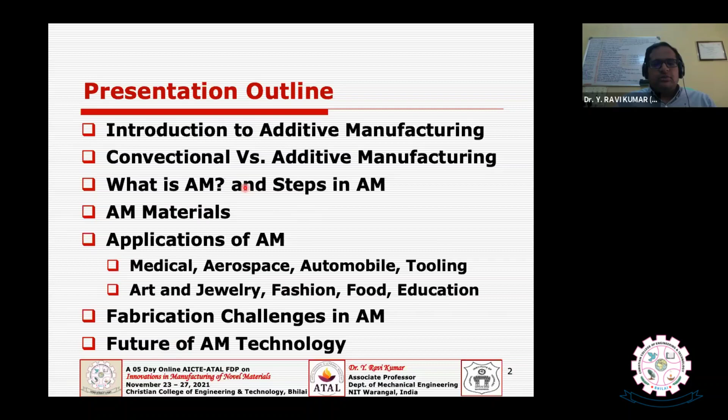And where is additive manufacturing fitting? We need to recollect the various industrial revolutions. We know the first industrial revolution. It was during the 1780s to 1860s, with the word coined as mechanization, where mechanical production systems were being used, replacing human muscle power, and steam energy and water energy were the sources of energy during that time, the first industrial revolution.

And coming to the second industrial revolution, between the 1870s and 1960s, assembly lines were introduced, and electric power was the source of energy, replacing steam and water. So that is the second industrial revolution. And coming to the third industrial revolution, computing, information technology, automation and electronics were the major technologies, during 1970s to 2010.

And coming to the present fourth industrial revolution, you have autonomous systems, cloud computing and system integration, simulation studies, IoT, Internet of Things, augmented reality, virtual reality, big data analysis, cyber security. So like that, you have several technologies. But what is going to be the manufacturing scenario under this industry 4.0? Under industry 4.0, undoubtedly the manufacturing is getting shaped into additive in nature.

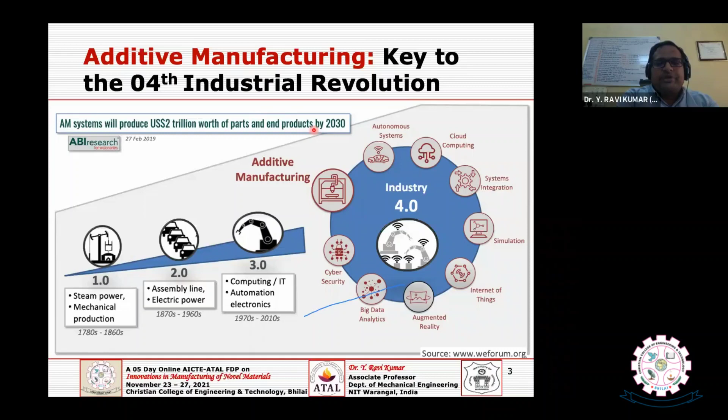So that's what various studies are quoting, that the additive manufacturing systems will be able to produce US$2 trillion worth of parts and end products by 2030. A lot of projections, a lot of expectations on this technology. Under the fourth industrial revolution, additive manufacturing is going to be the key technology as far as manufacturing is concerned.

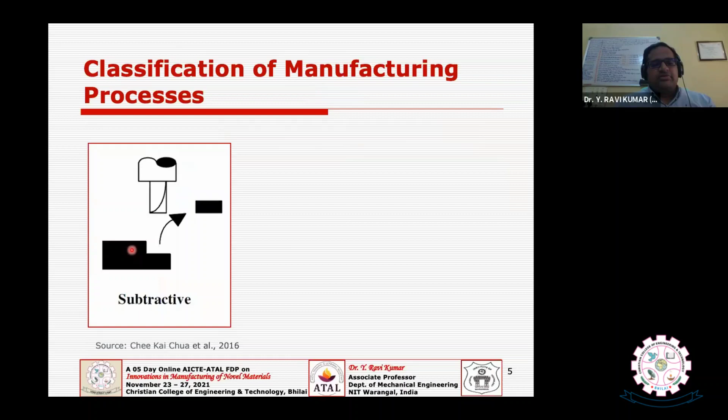Then let us quickly see, before starting the additive manufacturing technology, the classification of manufacturing processes. Of course, you come across the subtractive manufacturing process like CNC technology, where we need to start with the bulk material, which is in excess of the product you are looking at, and use tools to remove the material until you get the required size and shape. You keep on doing it.

But the major concern in this subtractive nature of manufacturing is scrap, huge scrap you are anticipating. And further, if you increase the complexity of the product, it may lead to an increase in the cost of production. We have other concerns, like sometimes we need to design a jig or a fixture to hold the workpiece. So like that, several constraints.

So if your design has been changed from a simple geometry to something like a coffee cup, this kind of freeform surface, you have to consider several constraints. Why? Because your CNC or subtractive manufacturing system has to be concerned about the cavity that is too deep here to machine.

What kind of tools we need to approach with, and you have an undercut here, which requires more than 3-axis control of the system, and we need to design a fixture to hold it from the bottom. That is an additional burden, and you have a sharp internal feature here which cannot be machined without a tool radius. So your approach starts from a block of bulk material to the required shape, and we need to consider these constraints.

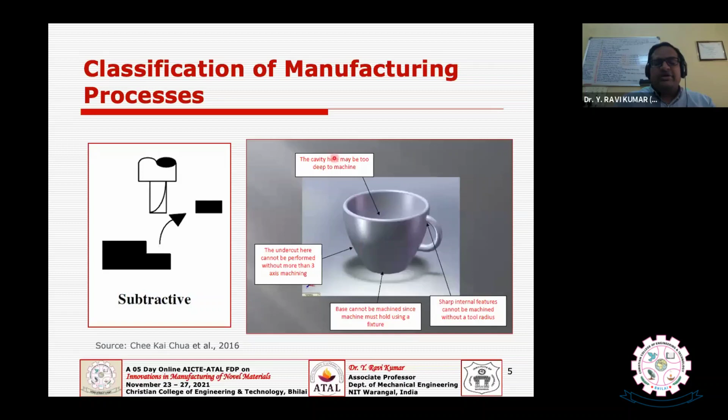But these constraints may not be an issue once you come to the additive manufacturing route. In additive, irrespective of the complexity, you are adding the material rather than removing it as in a subtractive process. Then there won't be any problem with scrap or wastage, there is no tool at all, and there is no need for a jig or fixture to hold the workpiece. You are starting from nothing to the final part, adding material as per your requirement rather than removing it.

Then you may have other manufacturing practices like formative processes, casting or forging technology, where we need to make a die or a mold of the shape you are looking at, and you apply force so the material is confined to the shape of the part, which is in turn the shape of the die. In additive, we need not worry about making a die or looking for tools. We need only the digital design. That is the only thing required for additive manufacturing, and we need not worry much about all these constraints.

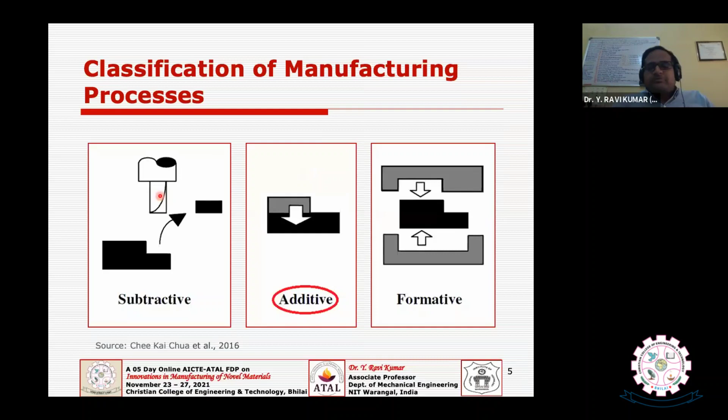Coming from conventional manufacturing systems, you may wonder what the cost of producing a part through additive manufacturing could be. If you plot cost per part against the number of parts, we know that for conventional forming processes like casting or forging, if you increase the number of parts, your cost reduces drastically. A similar trend can be expected from subtractive manufacturing. But for additive manufacturing you get a different trend: even if you increase the number of parts, your cost per piece remains the same or maybe slightly reduced.

So one can understand this may not be the technology for mass production, but the trend nowadays under Industry 4.0 is not mass production. It is going to be mass customization. Customization is going to play a vital role in the new industrial revolution.

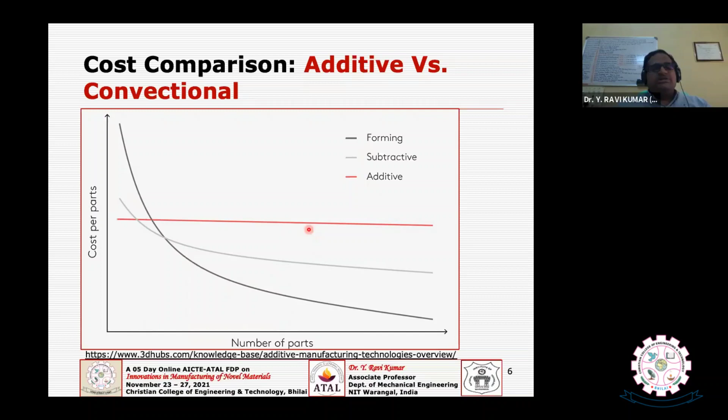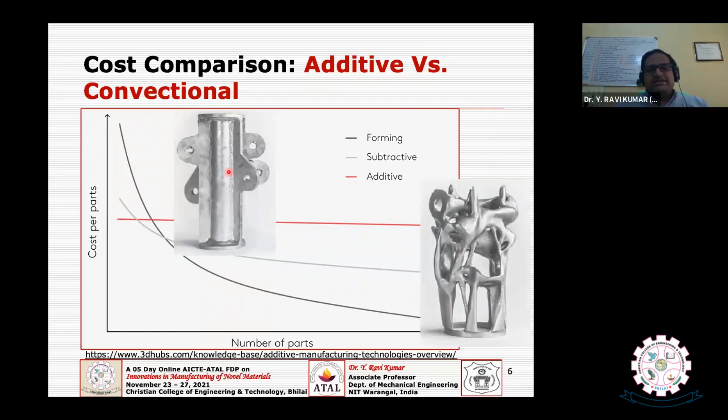And of course, the complexity is also increasing day by day in the products. Say, if you take a simple geometry like this, it may not be much difficulty for conventional manufacturing systems, and the cost involved is also very less. But say a design change has been made and it is more complex than the traditional design. Why? Because you want to change the design to improve the functionality or to reduce the weight.

So you have come out with some kind of topology optimized or lattice structure or some sort of bionic design, which is obviously very complex by geometry. And once the complexity has been increased, say 4x or 5x times, your cost also increases exponentially in a conventional manufacturing process.

But in additive manufacturing, you are going to get this complexity free of cost. Whether you produce this kind of part or this kind of part through additive manufacturing, the cost almost remains the same. There won't be much increase in the cost, even though you have a 4x or 5x increase in the complexity.

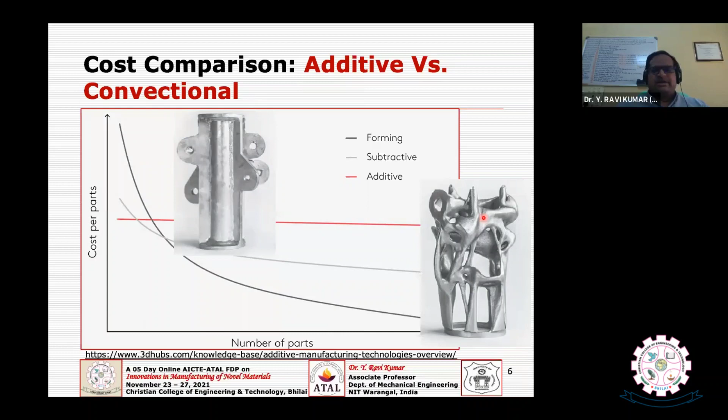And of course, you may be worrying about the number of parts. If the number of parts is restricted to a dozen or a few dozen parts, you can get a very good outcome from this technology.

For example, you may come across tool design applications where we need to design conformal cooling channels in the conventional mold or die making industry, like for injection molding or die casting, where we need to drill these kinds of cooling channels.

If you use conventional manufacturing systems to produce these cooling channels, you have the limitation that you can drill only straight cooling channels. Whereas if you use additive manufacturing technology, you can conform these cooling channels to the shape of the product that you are looking at.

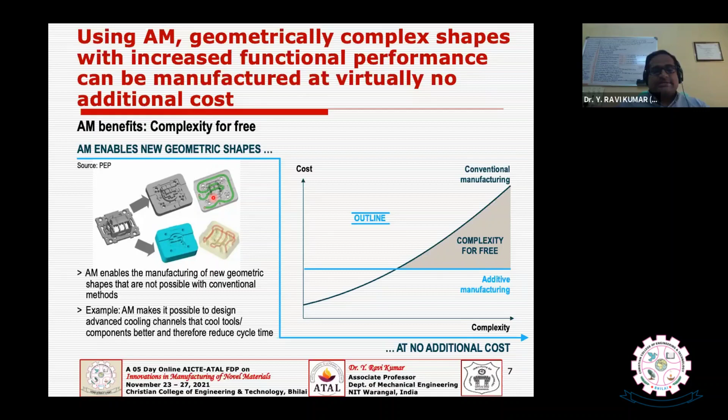And then, what is additive manufacturing all about? Additive manufacturing is not a new technology; it is about a 30-year-old technology. Probably the former name was rapid prototyping, where it was restricted to a designer's tool, used to make prototypes very quickly. The technology was confined to the design domain rather than the manufacturing domain.

In recent times, this technology has matured from the prototyping domain to manufacturing. That's why you have the term additive manufacturing. The word was coined and the definition given by ASTM F2792-10: additive manufacturing is a process of joining materials to make objects from 3D model data, usually layer upon layer, as opposed to subtractive manufacturing methods.

As a common terminology, additive manufacturing is used synonymously with 3D printing. Why? Because it is the extension of two-dimensional printing, where you have the third dimension. 3D printing is the fabrication of objects through the deposition of material using a print head, nozzle or other printing technology. And you can name this technology rapid prototyping, additive manufacturing, or 3D printing.

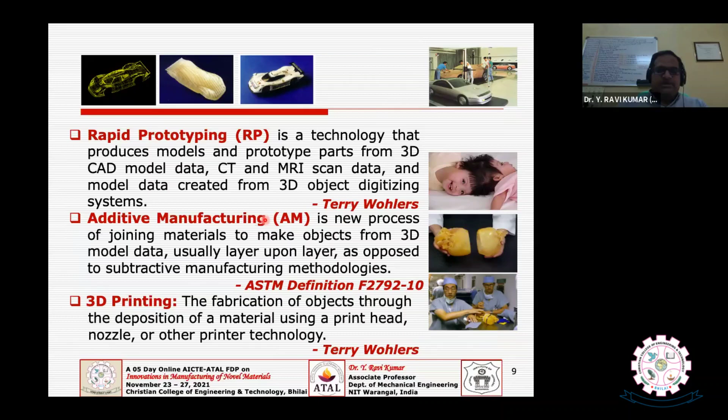Then what are all the various steps that additive manufacturing consists of? We need to understand that we start with digital data. Either you source it from CAD, or from reverse engineering data, or from medical data, or any source of data, but it should come in a digital format. Then let it come to the digital format of the product you are looking at.

So you are going to fabricate a coffee cup, the same example we are talking about. From the beginning, you have an application to sip coffee - that is your application. For that, you can go to any CAD package and quickly model this coffee cup.

Or if it is already available somewhere, you can just take that digital data. Or if it already exists physically, you scan it and get it digitized, and that will also act as an interface or input data for your additive manufacturing system.

Then that digital data should come out in a particular file format called STL. STL stands for stereolithography, which is a file format of a triangular faceted mesh geometry. That can be understood by any additive manufacturing system.

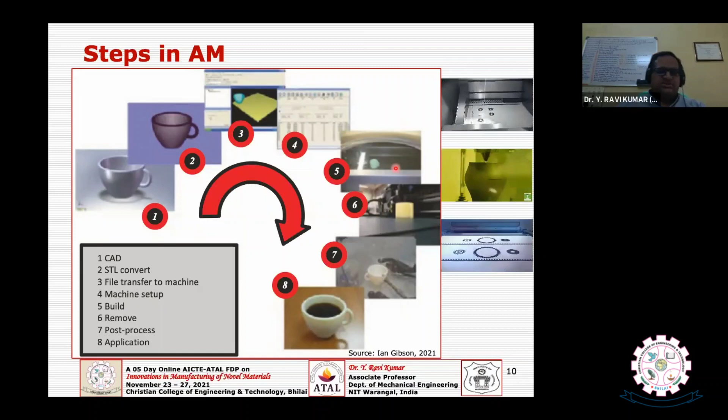So anyway, these are the steps. Any typical AM process that you come across should follow these. But here and there, the feedstock material and the energy source may differ, and with that, the physics of interaction of this material with the energy source may differ from one process to another. We'll discuss that further. So these are the steps involved in any typical AM system.

Coming to the materials, can any material be processed? When this technology started 30 years back, it was restricted to polymer printing, and that too, more or less, either a thermoplastic or a thermoset plastic, or a semi-crystalline or amorphous polymer.

But nowadays plenty of materials have been added to the additive manufacturing database. So what are all these AM materials? Of course, we can process polymers, we can process metals, we can process alloys, metal alloys, ceramics, composites, various kinds of composites. And apart from these four standard engineering materials, you can even process functional materials, like electronic materials, shape memory alloys, and so on and so forth.

Any functional materials can be processed, and not only functional or engineering materials, but even natural materials, biological materials like tissues or blood vessels can be processed. That is about organ printing. A lot of developments are happening in this direction.

You can even see food printers coming up now, food printing is another area where you can print food, or even for the construction industry, and so on. You can come out with your own material, maybe a natural material, or even a functionally graded material, or a tailor-made material. But whether all these can be processed, we will discuss that further.

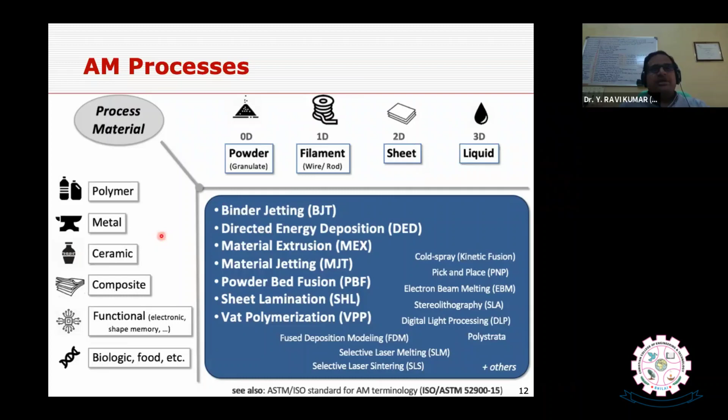So you have the material, and you have the design, and now you have the energy source, and you have the machine to process your materials as per your design, or as per your virtual model or digital model that has been derived from any one of these sources we discussed previously. So coming to the polymers, let us first talk about them.

If you talk about semi-crystalline, under that you have PP or PLA, polylactic acid. Under amorphous you have ABS, PS, HIPS, and PVC. These can be used for commodity kind of applications.

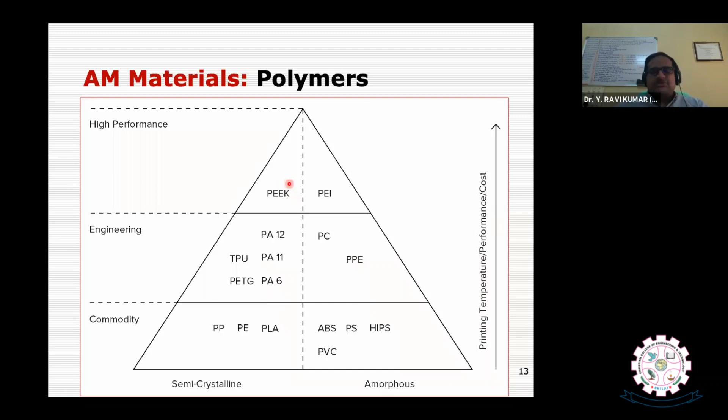Coming to metals, you have stainless steel with different grades. I've put only the commonly used metal and metal alloys, but you can extend this list with other grades and alloys - need not be restricted to this. Nowadays you have open architecture kind of systems where you can tailor-make your own material, not restricted to standard materials or compositions.

The only difference is what environment surrounds your material. Titanium and aluminum are more reactive materials, so you cannot anticipate the same conduction property or absorption of laser power. You may majorly use laser power, electron beam, or plasma, but it differs from reactive to non-reactive materials. You may need an inert environment surrounding it to take care of contaminations and oxidations - we'll talk about that at the end.

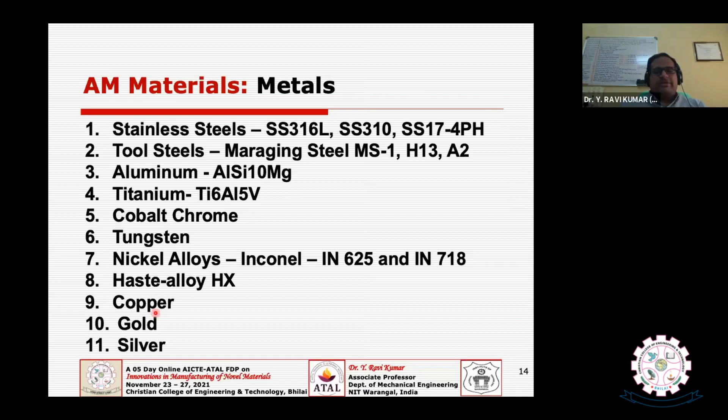Then these are some commonly used ceramics - zirconia with 3Y and 8Y zirconium oxide, silicon nitride, alumina, alumina-toughened zirconia, silica, hydroxyapatite, calcium phosphate for medical and other applications, and cordierite. You know the different challenges of ceramic processing versus metal processing - ceramics behave totally differently from metals, ferrous, non-ferrous, it's a totally different ball game.

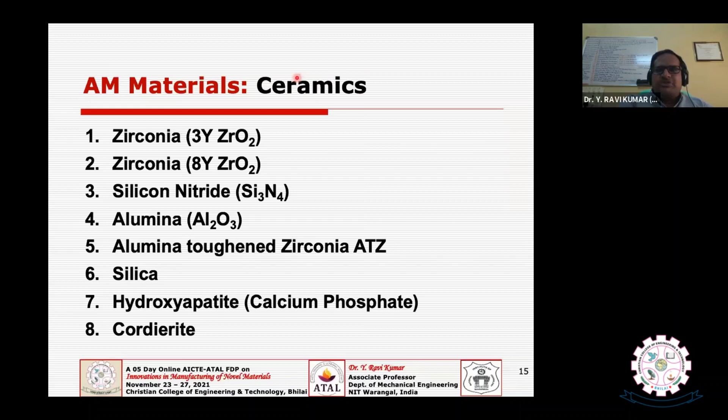So anyway, you can find in recent times ceramic printers also coming up, and material options in recent times have been increasing. And then coming to the composites: you can go with FRPs, Onyx, nylon, and you can go with continuous fibers like carbon fiber, Kevlar, fiberglass, HSHT fiberglass, and of course metal matrix composites.

So you can customize your compositions in your composites. But the only thing is, we need to come out with certain standards that are laid, so your feedstock materials should conform to that. Say, if you're talking about an FDM-based system, that is an extrusion-based system, you have a certain wire, maybe a 3 mm wire or a 1.75 mm wire.

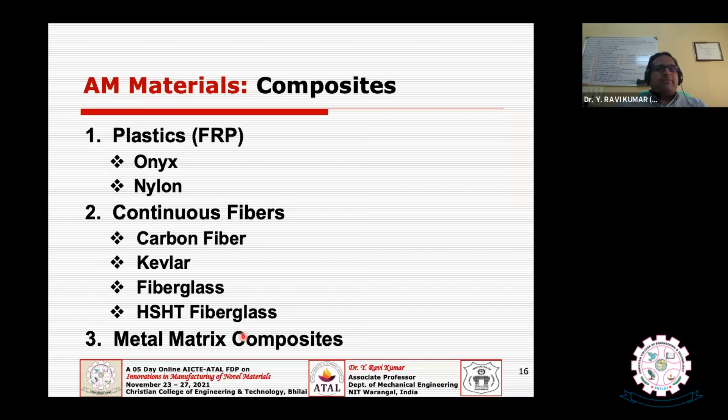And then how do you fabricate these fibers and these feedstocks for the AM machines? That matters, and we need to follow those sorts of standards, and then you prepare your own material to be additively fabricated. This is about the composites.

And you may have other materials: you can do printing in wax, printing in sand, printing with glass, printing concrete, and printing in living cells, or skin, or organ printing is on, where you can even cultivate these cells using cell cultivation, and further they can be grown in an incubator.

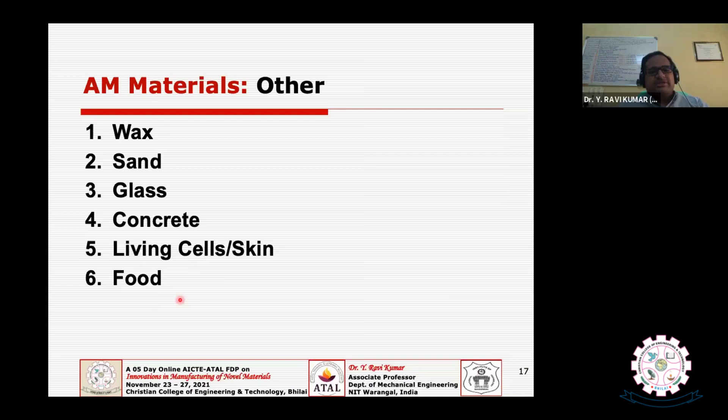And then you have excellent scope in using this additive manufacturing technology to fabricate even living cells, and it can even be food, or any natural material which you could print through an additive manufacturing process.

And of course multi-material objects like graded composition alloys can be easily done through additive manufacturing, through a DED system or a powder bed system, which is often used for grading of these alloys. And you can even make metal matrix composites, say titanium carbide, for your additively manufactured systems, so you can develop your material and it will work on these kinds of additive manufacturing technologies.

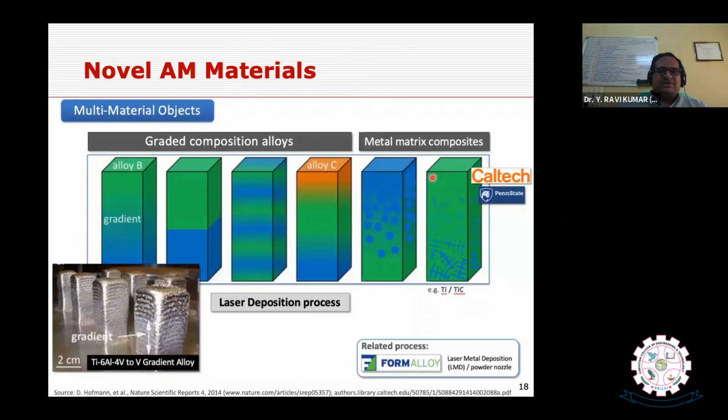But again, you may get doubts, sir, whether all the materials can be done on a single machine, but that may not be possible. You have certain constraints that we will discuss soon. So then we talk about polymer material processing through additive manufacturing technology. First, we are talking about the polymer, that is single step, meaning direct part production. Say the type of material is a polymer.

So for the state of fusion, you use either thermal bonding or chemical reaction bonding. You have broadly two kinds of fusion. And then the material feedstock: you bring it in filament form, as we just discussed, or as melted material. As for how your material is distributed, broadly you have either a nozzle or a print head, or it could be powder laid as a bed, or a liquid vat, or a laminate.

So if your feedstock is a filament, you take it, melt it, and through thermal bonding you extrude it from the nozzle. The basic principle here is melting and solidifying: you melt the polymer in the form of filament, that melted semi-liquid form comes from the nozzle, and it starts depositing and getting fused one layer upon another. So that is the material extrusion process.

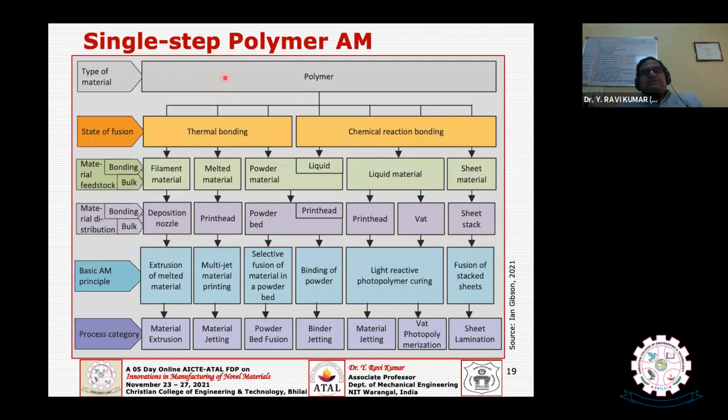And you can take the sheet laminates, using chemical reaction, stack the sheets, and fuse the stacked sheets. That process you call a sheet lamination process. So all 7 processes can be employed for processing of polymers in a single step. So this is about the processing of the polymers.

And then coming to the metals, you can go either in a single step or multiple steps, meaning furnace treatment further, or if not, you even have an opportunity to make your metal parts in a single step. So the type of material here is a metallic material. The state of fusion is either a melted state, solid plus melted state, or solid state. And the material feedstock is a filament or wire kind of material, or it could be a powder material, or a sheet or laminate based material.

And for the material distribution, you use a nozzle for depositing your melted filament or melted wire. The basic principle here is you will be selectively depositing the material onto the substrate, one layer upon another. And for the energy source, you use an electron beam, laser, or inductive heating; the laser is the predominantly used energy source, or you can go with other energy sources also.

And you have the process called directed energy deposition, where you can use an electron beam or a laser to process your melted state material, and that process is directed energy deposition. And you may use inductive heating, that is in a material jetting process.

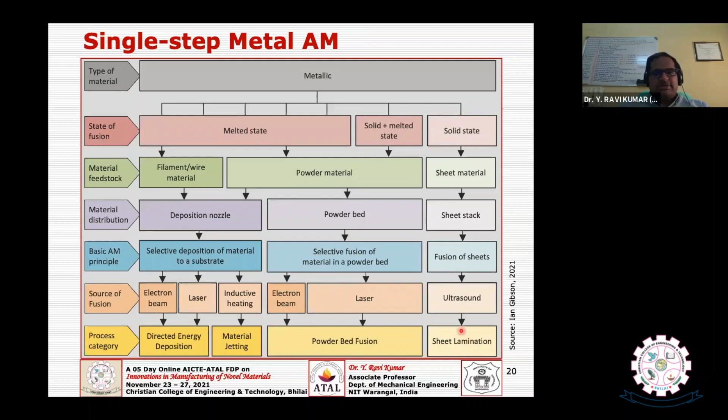So this is the single step process, or you can go with a multi step metal AM.

So in that case you can start with a metallic material, a ceramic material or a composite material as your feedstock material. Then the principle of adhesion: either you go with thermal bonding or chemical reaction bonding. The material feedstock is a composite material sheet that will be stacked, and the basic principle here is the fusion of stacked sheets. This is the sheet lamination process, and you are going to get a green part, a composite material part which is joined by your polymer addition.

But further it should be done through a secondary process, like furnace sintering, with or without infiltration. You can even go with thermal bonding. Thermoplastics can be used as a particle powder, coating binder particles onto metal, ceramic, and foundry sand. That powder is spread, then selectively bonded, and then we need to debind it and do the post processing.

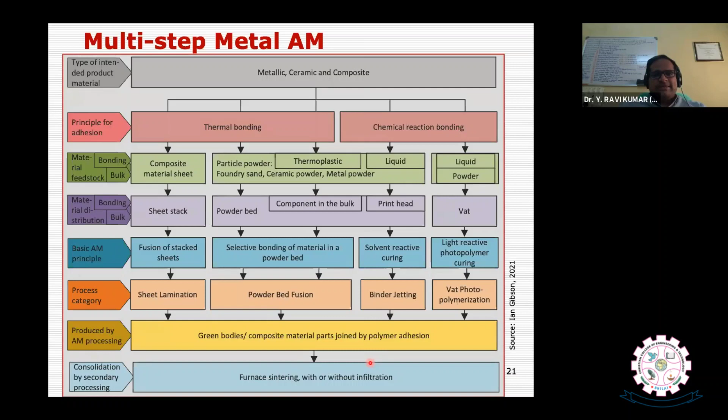Now we'll focus on the applications of additive manufacturing. The materials we just discussed are well-known, frequently used materials, but you can develop your own material as your application demands. We'll talk about the various industry segments looking at this additive manufacturing technology.

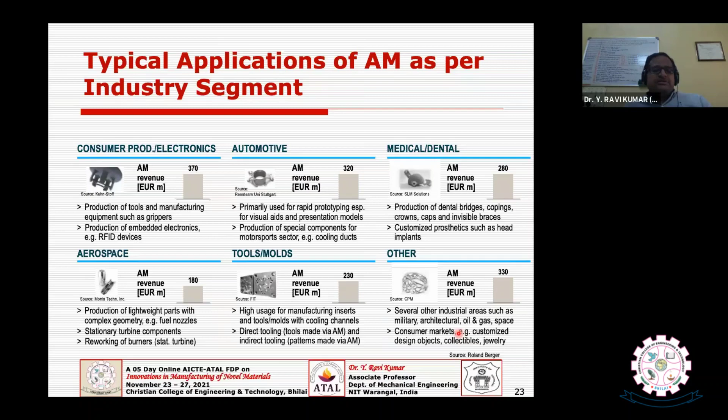So if you see the material cost, this may be made out of a superalloy, which is more costly, maybe aluminum, maybe titanium, or Inconel, a nickel based superalloy, but that is very costly. If you are able to save the material, that is quite interesting.

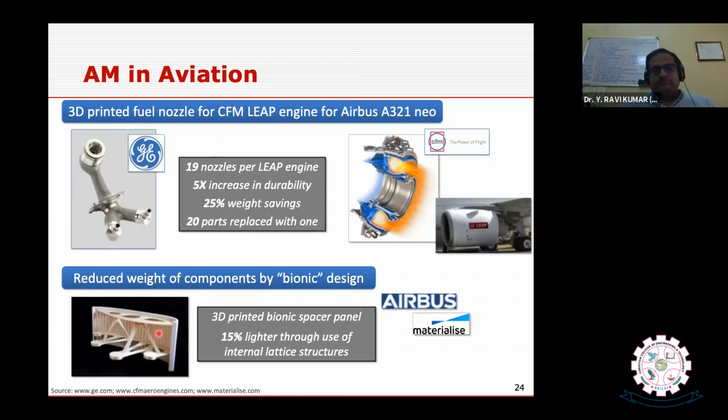What are all the benefits you're going to get out of this? You have simplicity in supply chain logistics. Otherwise, with conventional methods, you used to have huge logistics or a huge supply chain, whether you go with machining or investment casting. So you have a lot of supply chain requirements there. But here,

you have much less, compressed logistics or supply chain, and assembly is more simplified. You are able to consolidate parts, simplifying your traditional assemblies, and maintenance is also simplified because the part count has been reduced. And weight savings: more than 100 lbs of weight has been saved in this project. That's what GE is quoting.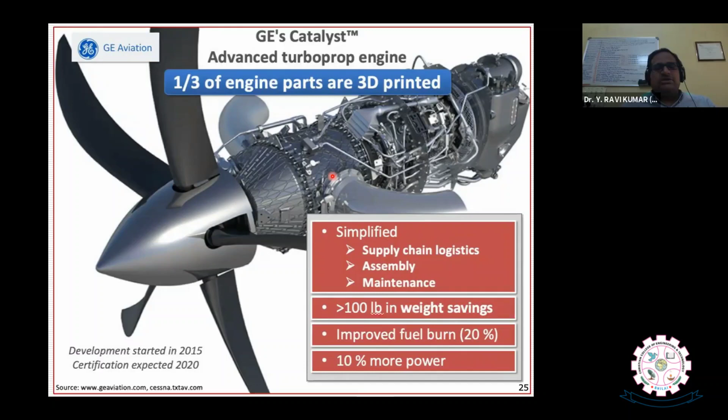And then you have improved fuel burn efficiency. The performance of the system has also been enhanced compared with traditional designs, with 10% more power. That's what General Electric is quoting, saying these are the things they are getting out of integrating additive manufacturing into manufacturing their Catalyst engines used for aviation.

And it can even be a monolithic thrust chamber with an internal cooling structure. You can make it solid in some regions, you have the fuel injection chamber here, the thrust chamber, and the lattice structures here, and all are done in a single go. It is not done separately and assembled. No, it is made in a single setup, as we can see.

You can make this kind of lattice structure, which improves cooling performance, and not only that, it's a double benefit: it's lightweighting the components. That is another advantage you get out of lattice-based designs fabricated through additive manufacturing.

This is normally done through CNC machining, with Inconel 718 as the material. But that is a great challenge for CNC, with a lot of wastage. But can it be done? This sort of lattice structure, can it be machined?

So that is the big question mark once you go with conventional manufacturing techniques. That is where you can get all this added value to the product.

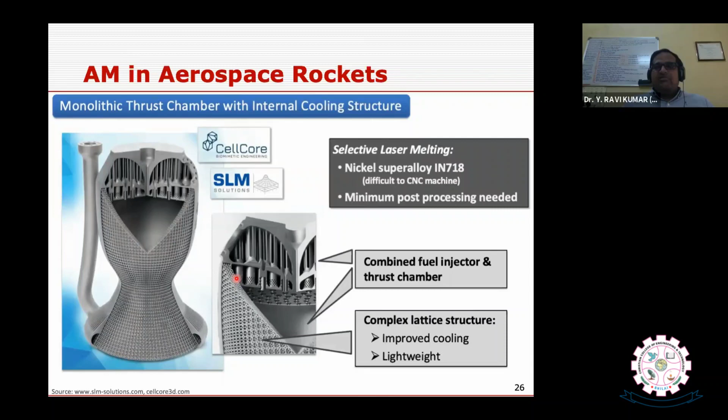And heat exchangers, where you can have bio-inspired and more efficient designs. It may be miniaturized heat exchangers, or bio-inspired, like lung-inspired heat exchangers, made using additive manufacturing technology, with aluminum or copper as the material. Now you are able to print in copper.

So you have a spiral design with 0.5 mm wall thickness. That is quite interesting - you can go up to 0.5 mm wall thickness, and it's 30% lighter than the traditional design, and 35% cost reduction. These are the advantages.

In this case study, they quote 22% lighter and 55 mm smaller than the traditional manufacturing parts. So that enhances the cooling performance of the heat exchanger.

Because of the bio-inspired nature, the complexity is free of cost here - you're not adding any extra money for these complex designs. But that is a major drawback when done through conventional manufacturing systems.

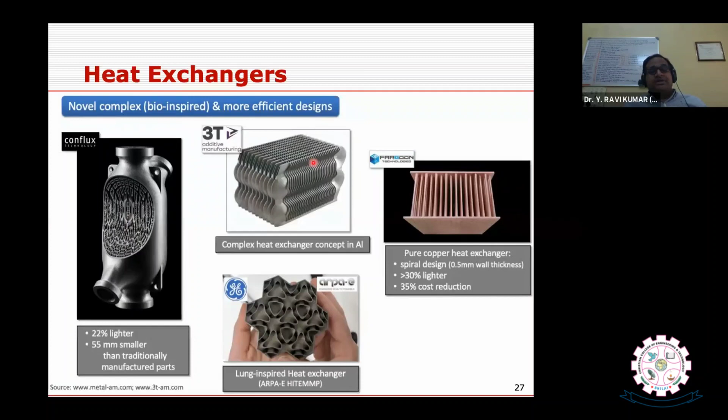Coming to medical applications, you can make an implant. These implants are so popular through additive manufacturing because of the same logic: customization, personalization, and biomimicry.

For tissues or bones, depending on how porous a particular patient's bone structure is, you have such freedom in designing these implants, which can biomimic either a chest implant, a spinal wedge, or a spinal cage - it need not be restricted to these areas. It could even be replacement of any joint.

That's why companies like Anatomics, Zimmer, or Stryker - globally well-known medical device manufacturers - are looking for additive manufacturing solutions. These are the reasons.

And you have some complex surgeries where we need to plan the surgery. Maybe a pediatric heart surgeon has to perform surgery on a month-old baby or a day-old baby. How complex it becomes for a pediatric surgeon to operate on such a young patient.

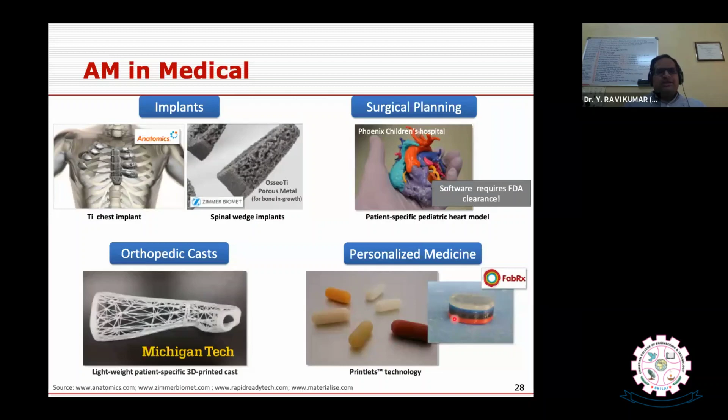We'll explore the development and other aspects in the next session, probably tomorrow's session.

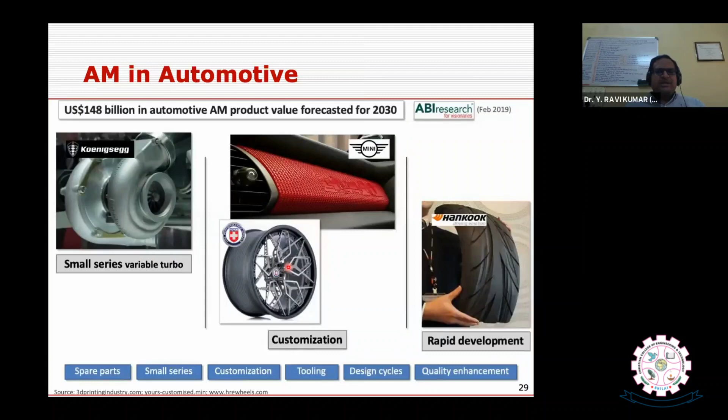Another advantage of the material here is you can make a biodegradable material that is easily printable, so it can be used in a more sustainable fashion. That is another added advantage of additively manufactured components.

And you can even make lightweighted car body designs, or for Formula One cars. Now composites can also be done through additive manufacturing, and you can make use of those composite structures that can be additively fabricated.

Or it could be an exhaust or intake manifold of an automobile, which has been predominantly used by the auto industry to manufacture these kinds of components.

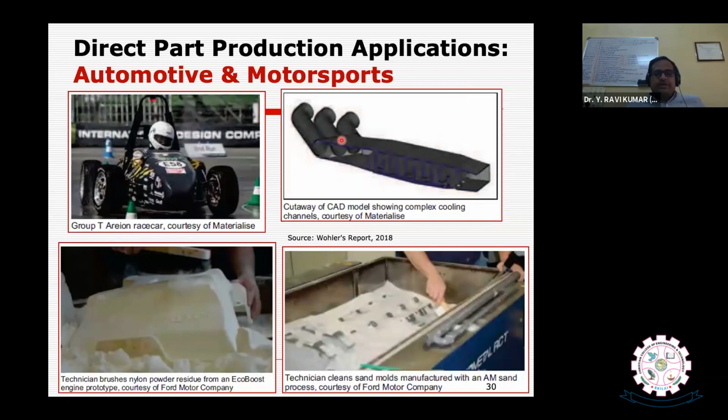Coming to the tooling applications, like investment casting applications, you can produce a master pattern out of this technology, and further it has been molded into the casting, so you'll get the final part. So you're either using a master pattern, or you can make directly the tooling, injection molding tool inserts that are additively fabricated, die inserts. And you can even make aluminum tool or wax investment casting patterns to produce components through one of the additive manufacturing processes.

That is through ultrasonic technology. And you can even produce conformal cooling channels inside - you can see this is a mold, the cooling core for the conformal cooling channel, which has been produced through additively manufactured parts. And further the part has been produced from this mold. So this is the part, this is the door handle of an automobile.

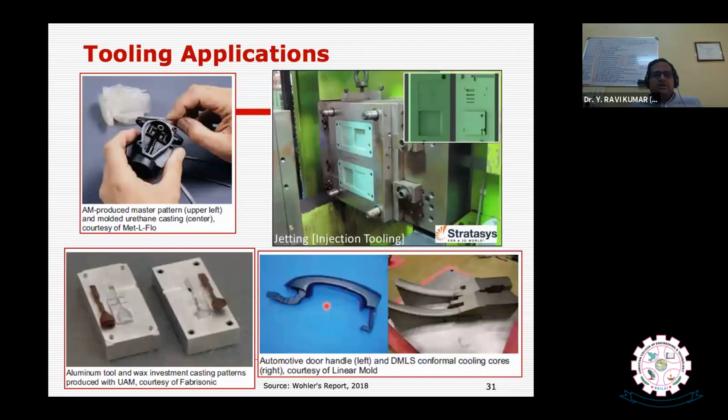So we can make use of this technology in terms of tool jigs or fixtures for the automobile industry for tooling applications. Or it could be a PMMA pattern with green wax sprues, and then further metal casted, or it could be directly printed sand molds and sand cores for casting applications. It's a semi-finished casting, you have the sand core, and further it has been finished with the casted and finished impeller. And you have the wax pattern, and further it has been done casting by making use of this as a master pattern, and further replicated.

So the idea here is that customization is the driving force, and mass customization.

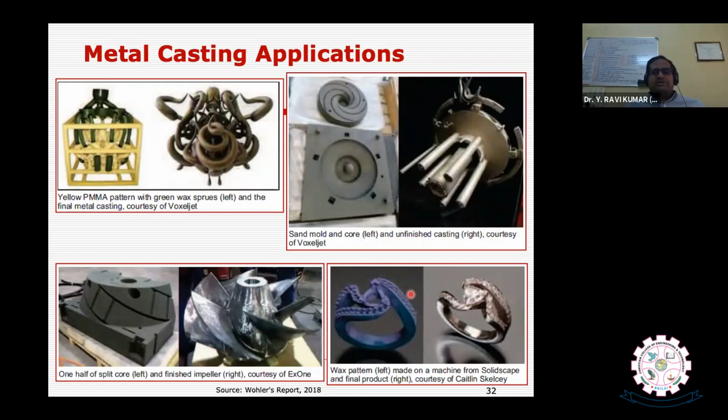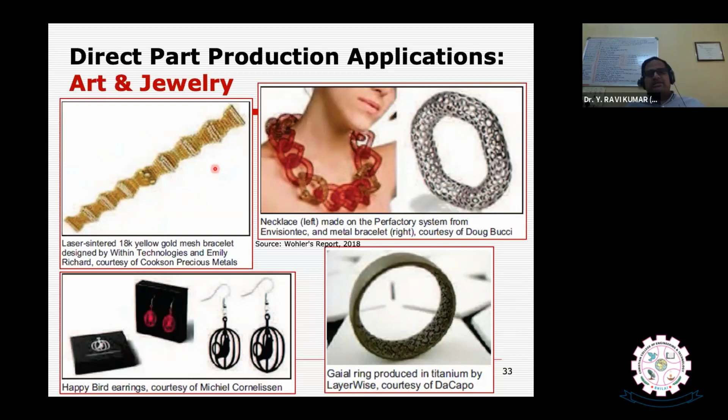That is quite an interesting scenario of this application in the jewelry industry. In art and jewelry, you have a lot of customized designs of necklaces or rings or any art and jewelry applications, where often you are looking for a lot of personalization of these products. That can be easily done through additively manufactured components. So either you make it as a master pattern, or directly make it as a part. Why? Because you have huge material additions in recent times, which you can directly make, or you can go with the intermediate process of casting, meaning making a pattern and then preparing a mold. So you have, even in India, the biggest users of additive manufacturing is the jewelry industry, where we can see a lot of customization in terms of rings or jewelry items.

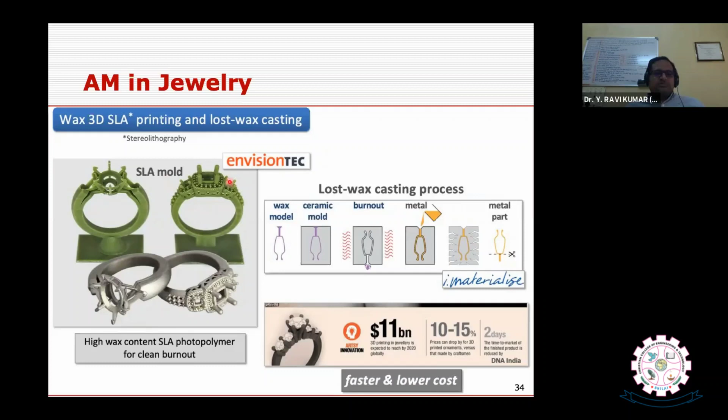Even lost wax casting can be integrated with your SLA - you get very refined features out of SLA. This is a mold, and then you have a lost wax casting process to further integrate this technology. You're going to get very fast and low cost production through this jewelry application of AM.

It is not surprising that your next shoe, maybe a 3D printed shoe that you're going to wear, at least the shoe soles. The reason is you can personalize your shoe sole as per your pressure points. That may not be much of a worry for a common person, but an athlete or a diabetic patient needs a certain personalization of these shoe soles. That can be easily done through this additive manufacturing technology.

You can personalize using TPU as a material, that is thermoplastic polyurethane, which you can directly print as lattice-based structures for more comfortable and more uniform distribution of pressure points, as per the user's requirement, so it is getting personalized. You can explore these innovative applications of this technology in several folds. I may be presenting very few case studies or industries, but you can even think and explore innovative solutions for any industry that you are looking at.

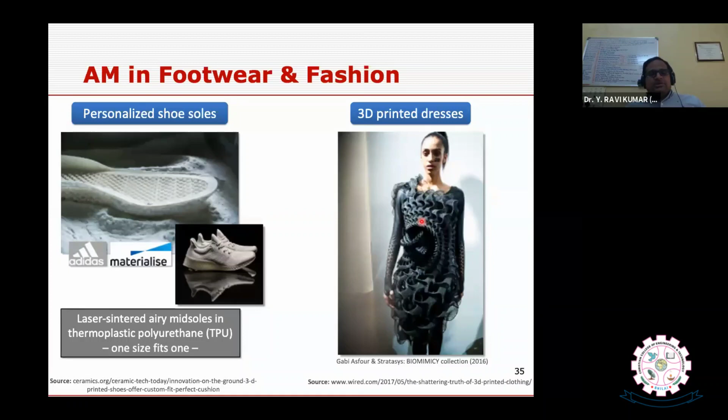Even that is the case for food printing, where again customization plays a vital role. You can mix your flavors - chocolate, or you can mix fruit flavor, or you can mix vanilla or any other flavors - so that you can customize the things.

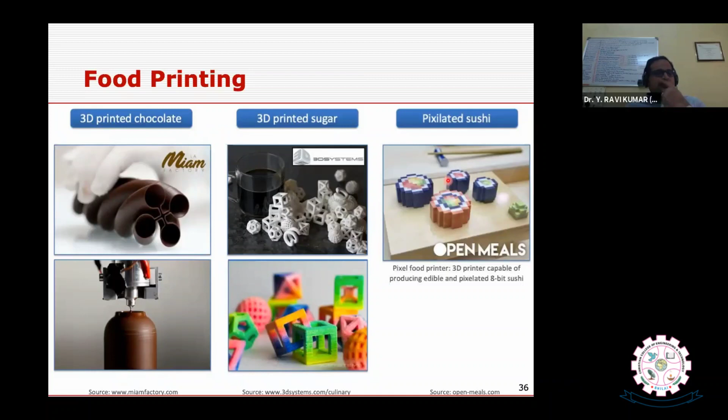That is the biggest advantage, where you can customize your food - maybe chocolate, maybe sugar candy, maybe sushi - or even you can prepare your own diet sheet, and then customize and print your food for consumption. That's what this technology is meant for. And last but not the least, even for education purposes.

You have a lot of scope to integrate AM technology into your curriculum. Unfortunately, we are not exploiting this much. But if you go to a European country or the US, the 3D printers, mostly DIY, thanks to the RepRap movement, have reached the common person.

Why? Because you have open source softwares, hardwares and firmwares to build your own 3D printer, which may cost you a few bucks rather than buying a proprietary machine which costs a lot. But still, how best can you make use of this technology by integrating it into your curriculum? For that reason...

The CBSE has already taken initiatives to start integrating this kind of course at the +1, +2 level, and even at lower grades of the school chain. And even AICTE is giving proper encouragement for thrust areas like additive manufacturing and 3D printing, along with robotics and other CSE and allied thrust areas.

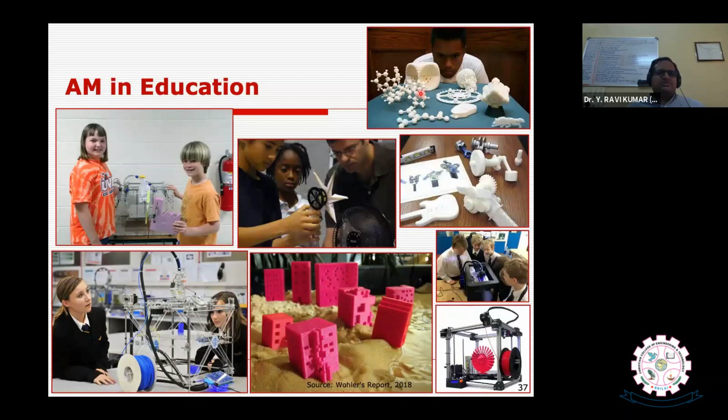You have small scale and large scale components that can be done through additive manufacturing. On one side you can have micro stents - a micro scale sized stent produced through a two-photon polymerization process, using photonic materials and metamaterials. This is the extreme small side of the structure size that can be additively fabricated as on date.

And on the other extreme, the largest size real building can be constructed through contour crafting technology, which has been used maybe for disaster relief, for quarantine booths during the pandemic, and for disaster management. But it can also be exploited for regular commercial construction business - that is the potential of this technology in the construction industry.

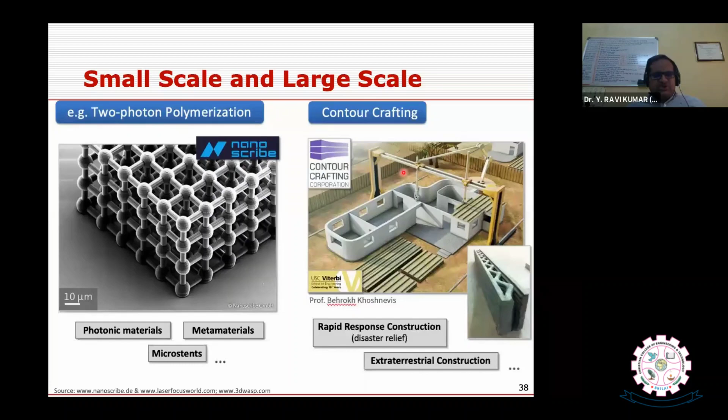So you can find several integrations of one technology with another - 3D printing or additive manufacturing technology integrated with robotic technology, where robotics is combined with printing technology to make structures of arbitrary size. This can also be done through an unmanned aerial vehicle or quadcopters, integrated with printing technology to have more action done through it.

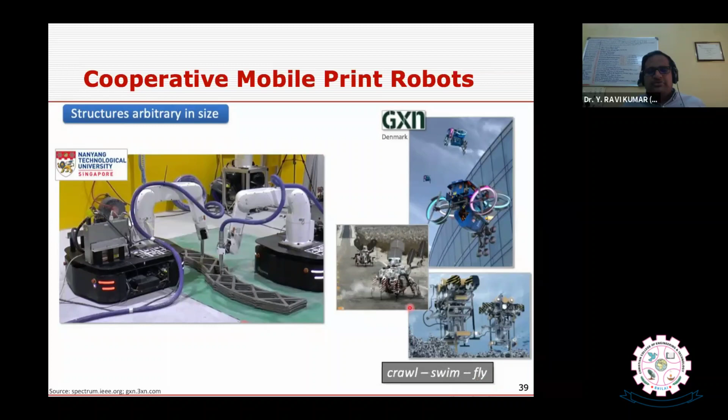And we'll come to the last phase of the presentation: are there any fabrication challenges in additive manufacturing? Of course, there are fabrication challenges in additive manufacturing. From the material perspective, I'm not a material scientist, but as a user of this technology, and from the stated literature, I will try to explain what fabrication challenges the additive industry is currently facing.

So, we have the process and quality monitoring systems in additive manufacturing. Why? Because now you are talking about Industry 4.0, artificial intelligence, machine learning, and deep learning. Can they make your additive manufacturing system smarter? It is still at the very beginning stage. I can say without hesitation, this technology must become a smarter technology than it is now.

Then why are you not able to get quality on par with conventional manufacturing like CNC technology? The reasons are several. Right from your feedstock material, its specifications and quality, the way you prepare the feedstock, and the way you follow the standards, but very limited standards are available in this area. So right from feedstock preparation, you have to closely monitor and control it. Otherwise, you may end up with a bad part, or with failure of the fabrication.

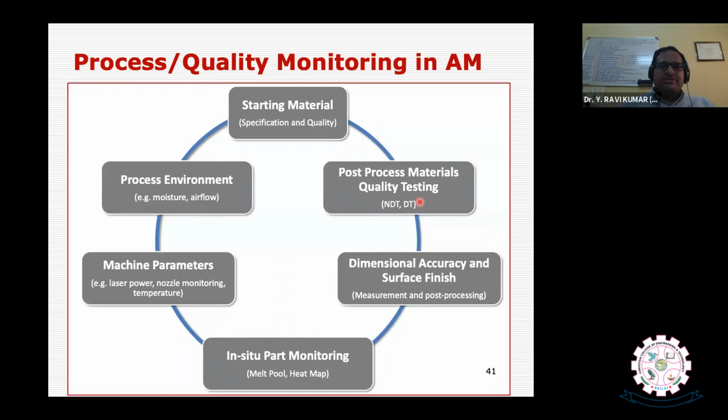And of course, dimensional accuracy, surface finish, measurement and post-processing methods: can they further increase the quality of AM fabricated parts? And post-processing material quality testing, NDT, and destructive testing. How can you integrate computer-aided testing and online inspections to further increase the quality of AM components?

And you have material testing in AM: destructive, non-destructive, and testing of the starting material quality, like powder flowability, powder particle size, contamination, or moisture content. Or even in situ melt pool monitoring, as we just discussed, and heat mapping. Can there be in-process monitoring via a light beam or spectroscopy, so that characterization, testing and inspection are done online or in situ?

And ultrasound and eddy current. Anyway, you can use the conventional methods you come across, like ultrasound, eddy current, X-ray or CT inspection, dye penetrant testing, process compensated resonance testing, fatigue, shear and tensile testing, and other non-destructive and destructive testing methods. The most important part is the melt pool monitoring system, and how you are going to control your melt pool.

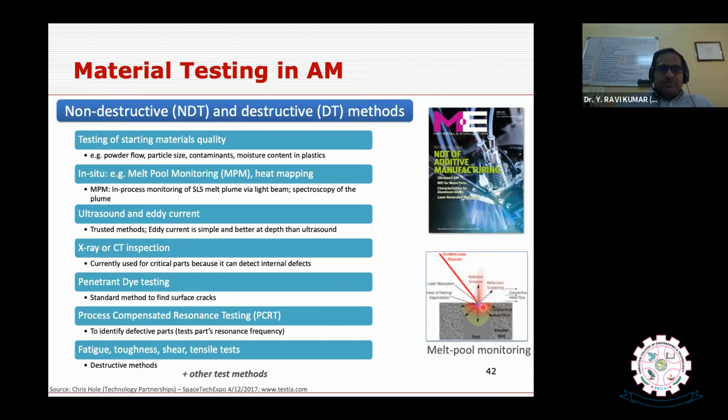You have the metallurgical history, or you have, say, the thermal cycle history, and then can it automatically control your process parameters in order to maintain the melt pool size as a constant, or can the parameters be automatically adjusted? So you have a lot of scope, as it has been integrated and developed along with these AI systems.

And you can have other challenges, right from the material, as we discussed, like the material type, powder size, powder purity; that is going to be the biggest challenge of the material preparation of your AM parts. And of course, design challenges: you have a geometry, and you have overhangs and support structures. What is the minimum size of the feature that you can get out of the machine? And that will dictate redesigning your parts sometimes, or modifying the design.

Additively manufactured components means you have the design for additive manufacturing concept: can it be designed for additively manufactured components? And why? Because you never talk about support structure, part orientation, or the other aspects of these challenges. Normally, you never come across these in the conventional manufacturing process, which we need to consider, and accordingly we need to optimize the designs.

So you need to have the design aspects, with certain challenges which you need to come across, take those challenges as opportunities, and keep working on it. And layout, like horizontal orientation, vertical orientation, object proximity, chamber filling, and so on, and organizing your build with multiple components. And on the process side, if you take a typical powder bed system, you have around 180 plus parameters to control your quality.

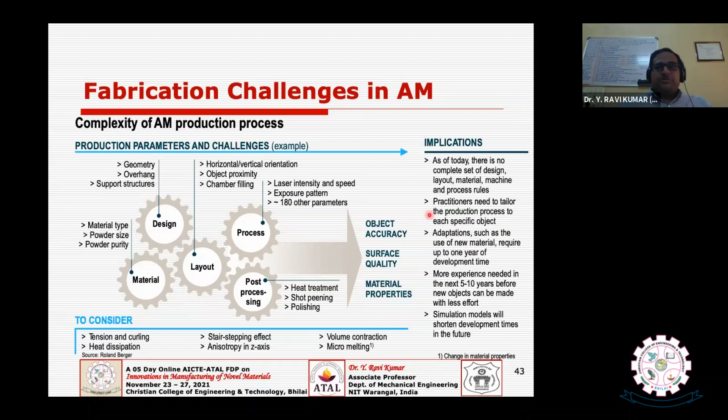As on date, you have several implications to work on all these challenges. We need to work on all these challenges to come out with the best possible quality at a more economical cost of production. So I have listed some of the common defects that you come across in additive manufacturing. The first one is the balling phenomena.

This balling phenomena is because of the differential surface tensions at different regions. Instead of laying a bead, it may create balling; it won't deposit in a continuous manner. You can find some balling action because of the different surface tensions. So how do you tackle this? We need to optimize the process parameters.

It should not be too high a laser power; what is the optimum power of the laser, and what is the optimum laser scanning speed? It should not be too high or too low. So what is the optimal set of these parameters? And you can find keyholes because of the vapor bubbles that have formed, and so on. Even chemical degradation and oxidation: with metals, there is always a chance to form oxides.

So how do you tackle that? Maybe you go with inerting. And then chemical degradation, or another cause, your moisture, or that kind of thing, which may lead to forming oxides.

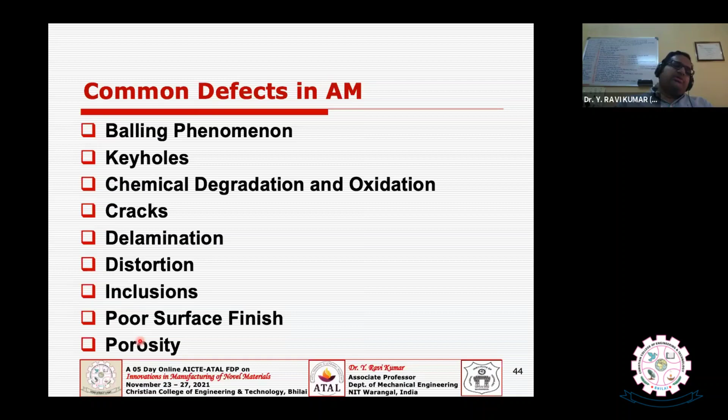And of course distortion, shrinkage, warpage, which differ for polymers and metals. So you have these problems, and some inclusions or poor surface finish, maybe the stair-casing effect because of inclined surfaces or down-facing surfaces. And porosity is another drawback, which may have several reasons, but you may do certain post processing, HIPing, or furnace treatments to come out with a 100% dense part. But still, you need post processing, or to some extent you identify where you have these problems and whether they can be minimized during the processing of these materials.

And then what are the standards available in the market, ASTM or ISO? Though this technology is 30 years old, the ISO and ASTM additive standards committees formed around 17, 18 years back, when they started developing various standards. As of date, around 35 to 40 standards have been developed and published, and another 35 to 40 are under development at various stages.

Right from the design guidelines: you have general design guidelines, powder bed design guidelines, DED system guidelines, or even functionally graded materials. You have material extrusion design guidelines, and design guidelines for post processing. These are some of the design guidelines that are available.

And coming to feedstock standards, for characterized powders you have titanium 6-4, F2924, titanium 6-4 ELI, F3001, Inconel 718, Inconel 625, stainless steel 316, and AlSi10Mg. And coming to file formats like STL, that is an old file format, but it is still going as a de facto standard. They are trying to replace it with the AMF file format with the new standards.

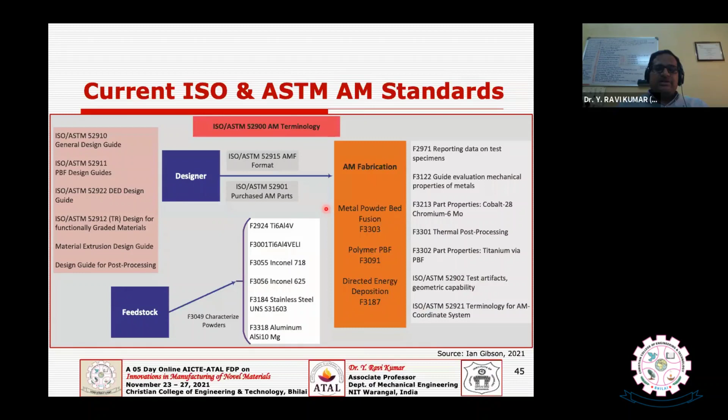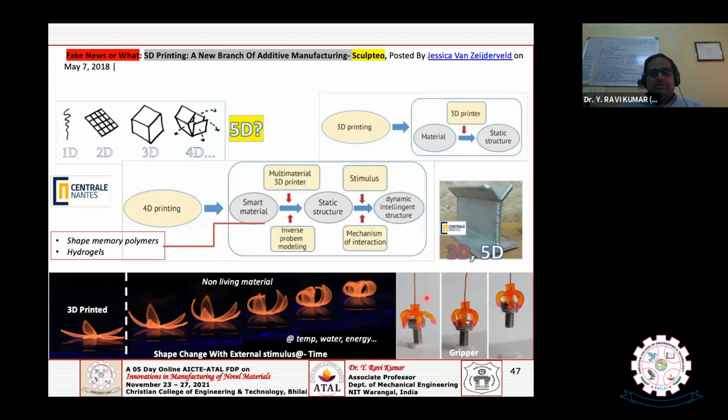Or even it could be, what do you call, a life-saving application, like if you have a stent which has been placed in your heart, and whenever you have a massive stroke, can it act automatically without blocking your blood circulation? Can it act more intelligently in that situation? So that is a life-saving application of 4D printing, and we can talk about several things like that.

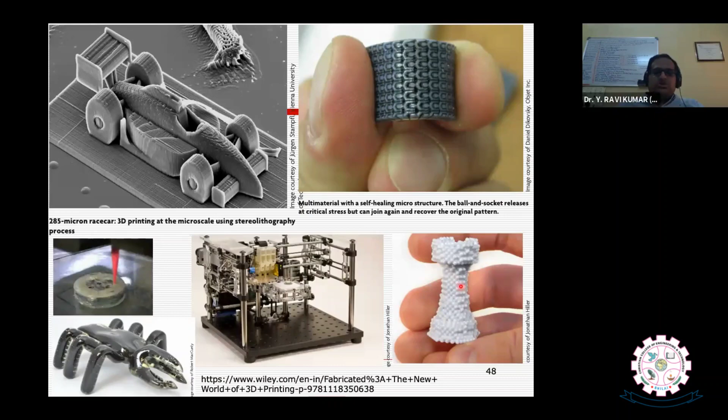So then what could be the future? Is it going to be layered manufacturing, or is it going to be voxel-based assembly? You have voxel assemblers where millions of voxels per second could be assembled. So this is where we can expect the future direction.

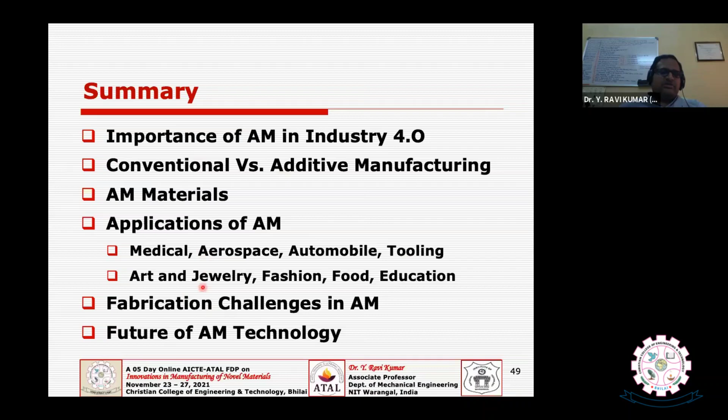So let me summarize what I have done for the past almost 2 hours. We started with the importance of additive manufacturing in Industry 4.0, and compared conventional versus additive manufacturing processes. We discussed commonly used AM materials and applications of AM in various fields like medical, aerospace, automobile, tooling, jewelry, fashion, food, education, and fabrication challenges were also discussed, and the future direction of AM. So this is what we have discussed during this session.

And coming to the facilities we have at NIT Warangal, we have a metal 3D printer capable of printing in metals, the 3D Systems make DMP Flex machine, a couple of Stratasys make Dimension series and Mojo series machines, desktop printers like Ultimaker 2 Plus, AnyScan and SenseScan 3D scanning devices, and a muffle furnace and shot peening for post-processing of metal 3D printed parts.

And we have dedicated software for additive manufacturing. We have Mimics software for medical image processing, Magics software for STL repairs and tool design applications, and 3-matic for designing customized medical devices. And we have Catalyst software and 3DXpert software for simulating builds for metal as well as polymer systems. So these are the facilities we have at NIT Warangal.